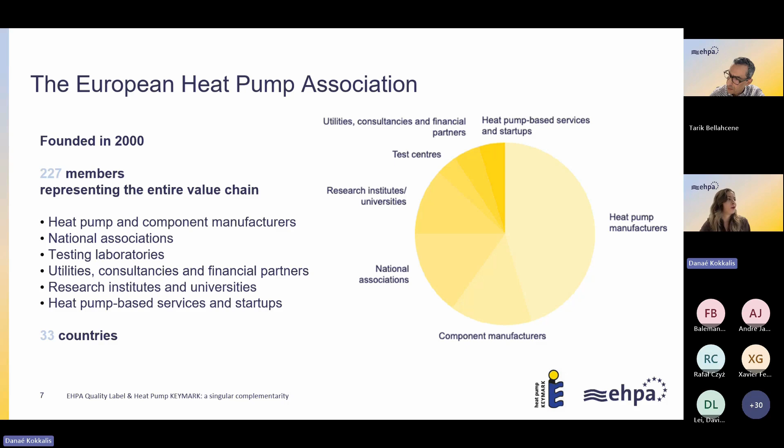So I'll give you a brief introduction of EHPA, as I said. So we're talking about Heat Pump KEYMARK, we're talking about Quality Label, but what is EHPA and where does it stand in all of that? So we are the European Heat Pump Association. We currently have over 220 members. We were founded in 2000. And our membership covers the entire value chain. So we have heat pump manufacturers, component manufacturers, national associations, but also testing laboratories, utilities, consultancies, research institutes and universities, and also some heat pump-based services and startups. So we really cover the entire value chain, and we are represented in over 30 countries.

So we are broken down in 4 departments. We have the policy team. They are the ones who do the advocacy work. They are the ones who are between our members in the sector and the institutions, trying to make sure that the decisions made at European level reflect the needs of the sector. We have the projects as well. We are involved in quite a lot of European funded projects, and we also have the Heat Pump Award held annually, and we usually announce the winners at the forum, which is our annual event in September.

We also have the comms and events team. So our role is to communicate effectively and translate the association's work into clear, engaging, and hopefully persuasive messages. And we do that both on online platforms, but also during in-person events that we organize. And finally, but not least, we have the Heat Pump KEYMARK and Quality Label. So as EHPA, we are coordinating the Heat Pump KEYMARK Secretariat, but EHPA has also developed the Quality Label program. I will not tell you more about this because it's actually the topic of today's discussion.

So all I can do now before I pass the floor to Tarik is ask you what category best describes you. And this calls for another poll so that we get to also know you a little bit better. So now on your screen, you should see another poll with the question, what category best describes you? So you can choose, I am KEYMARK certified and would like to get the quality label. Or maybe you have the quality label but would like to get the KEYMARK certification. Or maybe you have both the KEYMARK and the quality label. Or none of the two, you are not certified, but you are interested in getting certified. So I'm looking forward to seeing what you are replying.

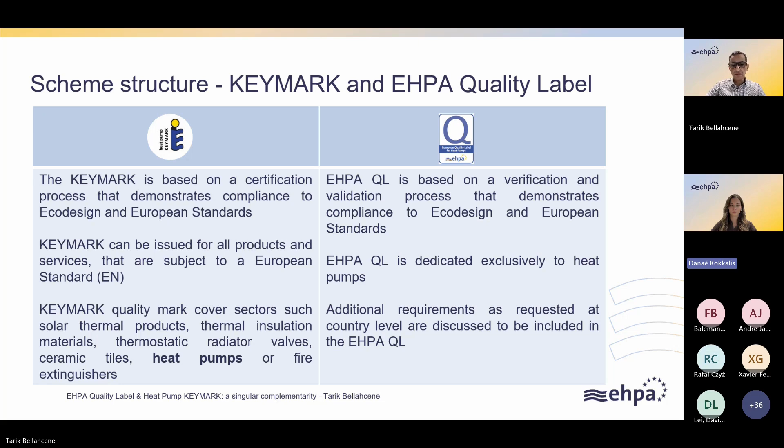The work, the rules, the requirements, new products, new technologies that are included when we expand the scope of the KEYMARK, which is always open to expansion, there is no restriction in terms of products and technologies. This is the steering committee who is doing the work. So they will look at how new requirements and eco-design developments coming with a new version will be included, to make sure that the KEYMARK is aligned with the requirements. So this is the steering committee work. And then the scheme group will oversee and review the steering committee work and vote to adopt any changes, modifications, extension, or any decision.

Then between the scheme group and steering committee, there is the KEYMARK secretariat. That's where I'm sitting with Danae at EHPA. We are running the secretariat, and by the way, we have our mandate as secretariat extended for the next 5 years at least. So we are happy that we had the confidence of the scheme group and the steering committee renewed. So we are the secretariat coordinating the scheme group and steering committee, and helping to communicate within this triangle of manufacturers, steering committee, scheme group, and we have in the middle, of course, the laboratories and the certification bodies.

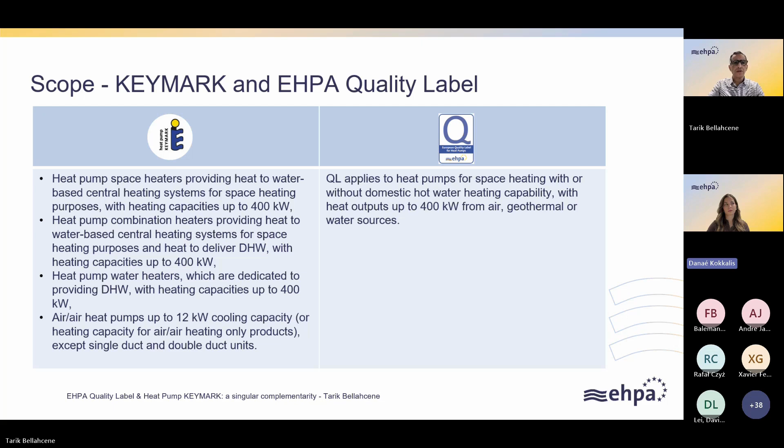For the tests that we do, here the same, we have a comparable scope of testing. So we are always challenging the heating capacities, the hot water, of course the sound power, and we have all the operational tests related to the equipment, and the product documents. Quality label is going a little bit further with the product documentation, and they look at the customer services, so the aftermarket availability of spare parts and things like this. But again, we can easily compare the two types of test. Nothing really specific is different from one scheme to another.

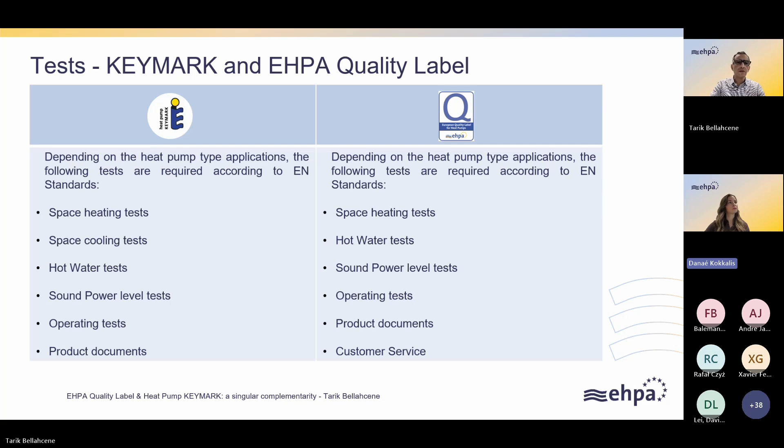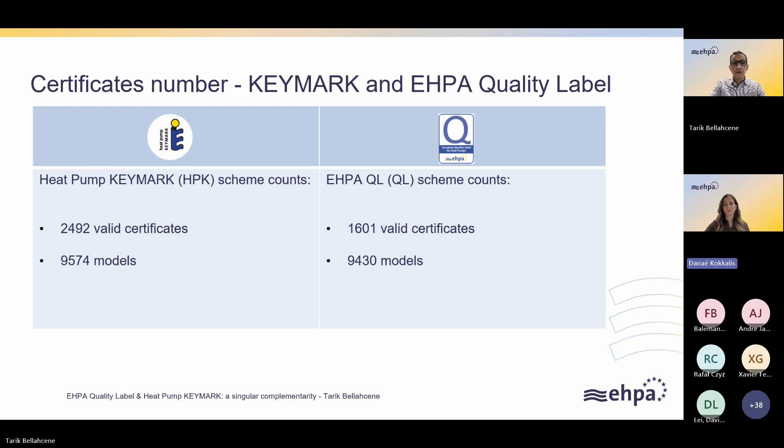So in terms of number of certificates, we have for KEYMARK around 2,500 valid certificates. For quality label, we have 1,600, and almost the same number of models are covered for both. So we have 9,500 models, more or less, for both schemes that are holding a KEYMARK certificate, or they have the quality label, or both in some cases.

Now for the process for the KEYMARK, we'll have André later, who will explain in detail the process and the approach, so it will be interesting to listen to him. Here I'm giving just a brief comparison again. For the KEYMARK, the manufacturer or the distributor will go first to one of the empowered certification bodies. They will discuss the project. They will agree on the family of products, types, subtypes, and selection, and decide what testing is to be done. Is it a periodic testing regime or something else? All this will be discussed between the manufacturer, distributor, and the certification body.

And then there will be the choice of the laboratory. The manufacturer will need to opt for one of the laboratories working with the specific certification body they decided to go with. And then we start the process of the auditing, the factory inspection. The sampling will all be organized with the certification body and the laboratory. When the testing is completed and the audit or inspection report is done, the certification body will review both the test report and the audit report, and any non-conformities of the audit, and will make a certification decision and deliver a certificate. Then the certification is delivered and the database will show your certificate. André will tell you more about this later.

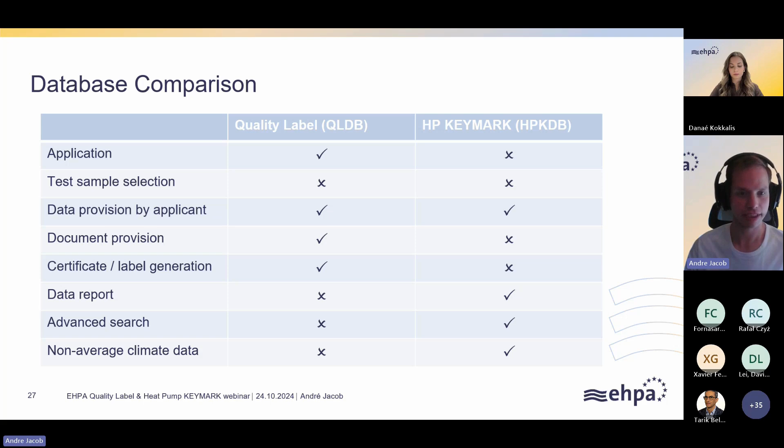The application process is therefore different. For the KEYMARK certificates, applicants reach out to CBs outside the database, and they don't reach out to national secretariats or national commissions within the database. When you first start with the quality label, you need to reach out to one of the national secretariats to have your distributor added to the database and obtain access to manage applications for that distributor. This is managed in common by all the national secretariats, so it does not matter which national secretariat you reach out to, because they all manage the data.

The test sample selection is in every case handled outside the databases. In both cases, the model data is entered by the manufacturer within the databases. For the quality label, the performance data might be imported from the KEYMARK database through an interface that connects both databases, and we will cover that later. The document provision is also handled within the quality label database, but not within the KEYMARK database.

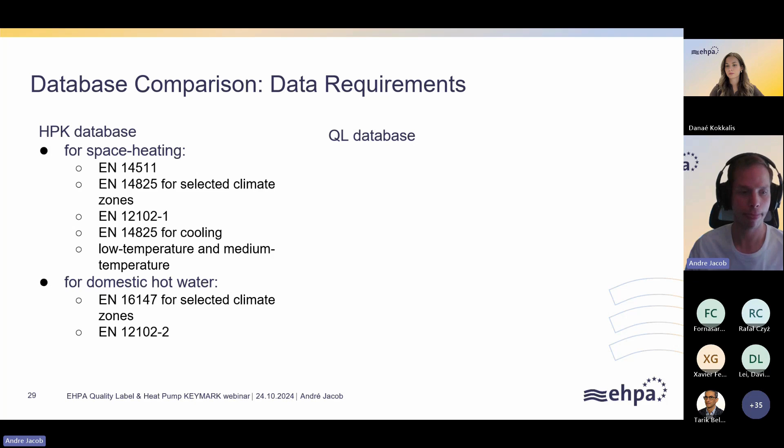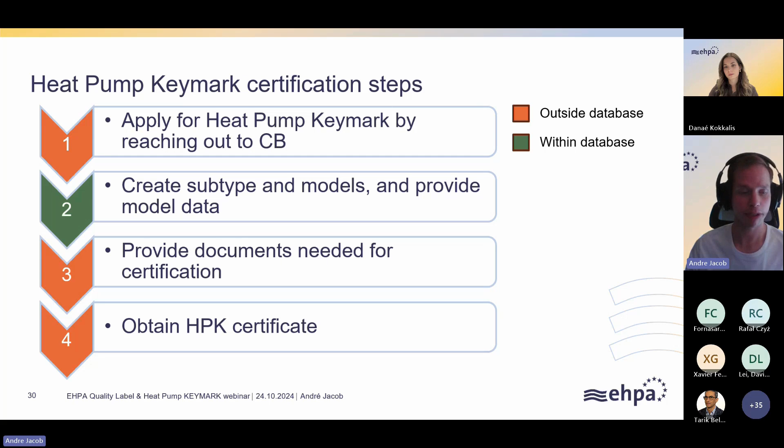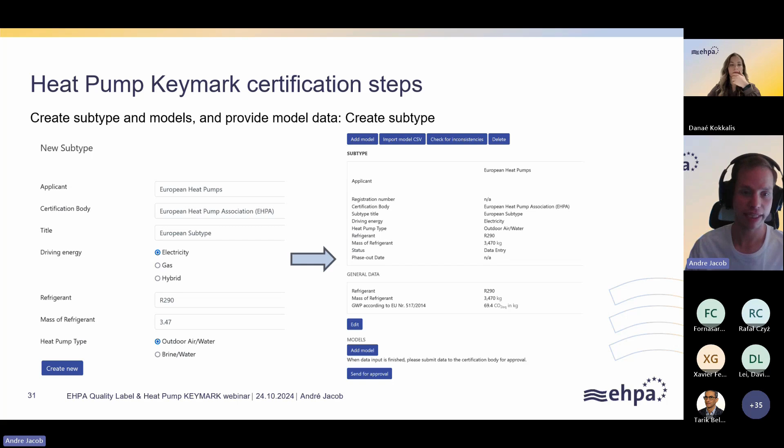So these are the steps to create a subtype. You first create a new subtype, and you select your certification body in that very step. In this case, it's the European Heat Pump Association for testing. Then you select the driving energy, the refrigerant, and the mass of refrigerant, as well as the heat pump type. This is common across all models of that subtype. After creating a subtype, you will get to the detail page, and you can then spot the add model button at the bottom.

After adding a new model, you select what this model is used for. For example, it's heating at medium temperature, but it could also be a low temperature heat pump or a combination of space heating and domestic hot water heat pump. In this case, it only has an outdoor unit, so it's a monoblock outdoor heat pump. We would also additionally get the data certified for a colder and warmer climate, and it is reversible.

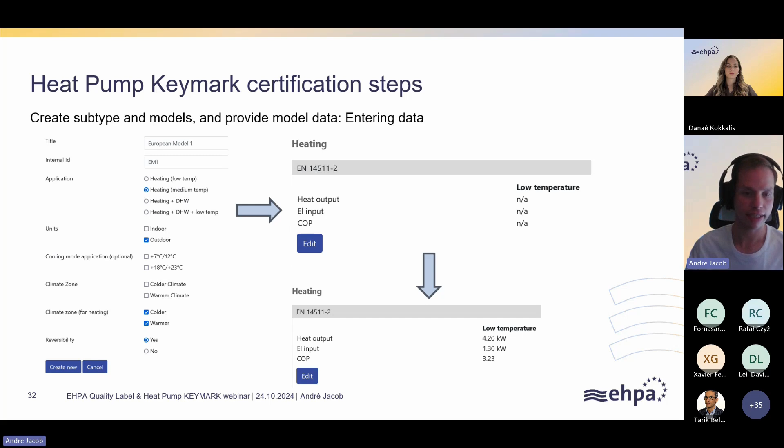After creating the model in the database, you get to an empty overview of the data, indicated by not available across the entire data sheet. Then you can click edit and add the data that belongs to the model. After saving, you can see in the bottom right side of the slide that there's now data shown in that data overview.

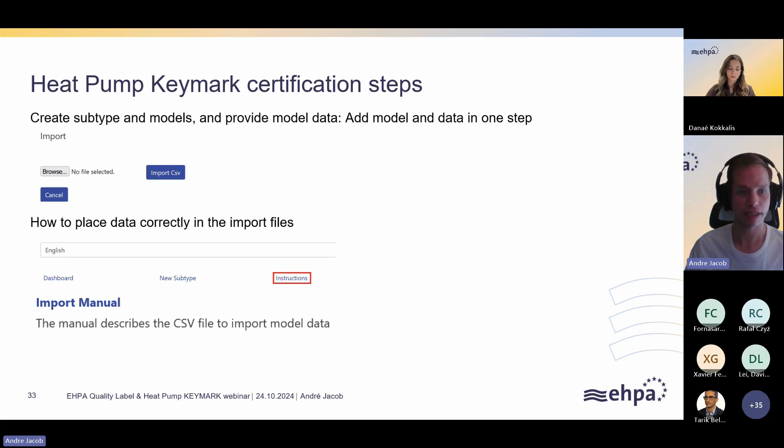Because for subtypes with a lot of models this is very intense and time consuming, you can also import data using CSV files. To know which data is coded in which way, there's an import manual. When you get to the database, you will see three links below the language selection, and when you click on instructions, you will see the import manual, which shows all the data fields in the database. So, using an external tool, you can map all the performance data you'd like to have certified or copy data.

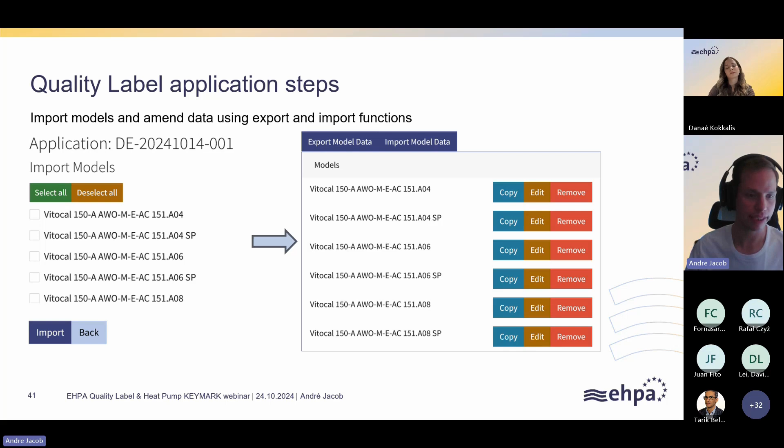And you can either do this by clicking on Edit or exporting the model data. So you get an Excel sheet, and then you change the data in bulk and then import it, and existing models would be amended by that new data. And after doing so, you can also submit the application, and only after doing so, the data is checked for validity.

And this is done by the national commissions, and there is no automatic control for the performance data entered by the manufacturer. But prior to submitting the application, you still need to provide the documents, as Tarik has indicated before. The quality label has a slightly different scope and also asks for after-sales service and installation manuals, owner's manuals, and goes in that regard beyond the KEYMARK.